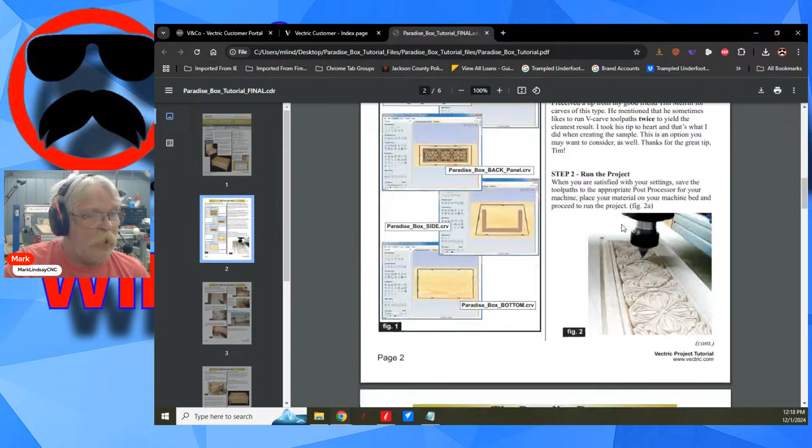It's step-by-step instructions and all of the CRV files needed to cut this project, and there are links to all of the parts and supplies that he used for it. To show you how old this project is, this is compatible with VCarve and Aspire version 7.5 and later.

Now, something else to consider: you have to go through and check these out one by one. But a lot of these projects are trial version friendly, meaning that if you have the free trial, it will run on the trial version. You will need to go through and look at each of these.

This Christmas sled is also very well received. It's a little miniature sled for Christmas, and it's a very well received project. A good percentage of these are trial version friendly, meaning you can open up this file in your version of the software, generate G-code, go outside, and cut the project itself. There are a multitude of projects over here. I mean, you name it.

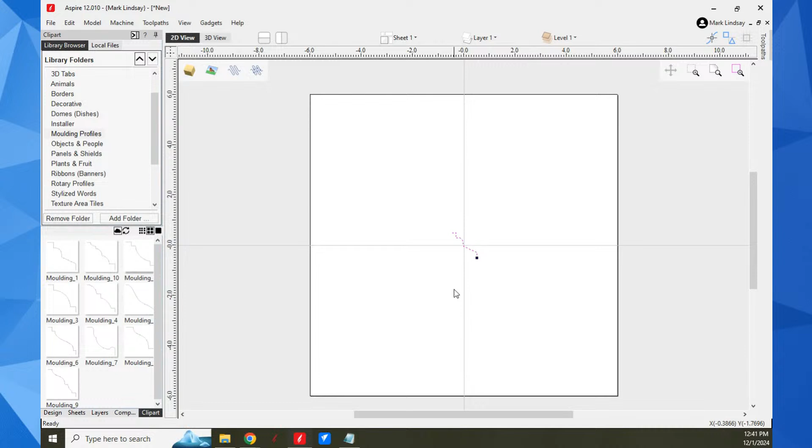Okay, Butch is referring to - let me bring this back on screen - these, let's see, not 2D vectors, it would be molding profiles here. Butch is referring to, let's use this one because it's simple, these molding profiles. Let's put it somewhere where we can see it, not on the center lines.

And using them, you said using them with the create shapes with custom profiles. So you're basically using either two rail sweep or extrude along one or more vectors.

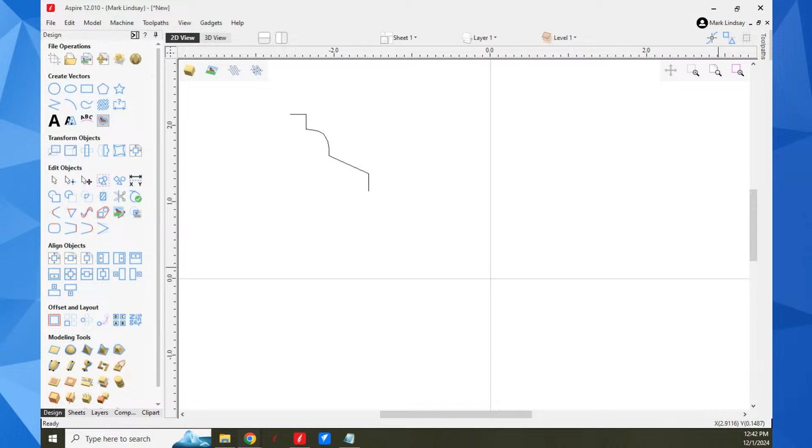How well does that work on, say, a sign outside border, and what bits to carve? They do work very well as far as an outside border. But the thing you have to remember is, let's say this is my outside border and I want to extrude this along - let's see, fifth icon along the top row - oh, this one here: create shape using a custom profile.

You know, I don't know that I've ever used that. Let's try it out. What I'll need to do though is create a vector. So let me create a vector. I'm going to make one. We're going to see how this works.

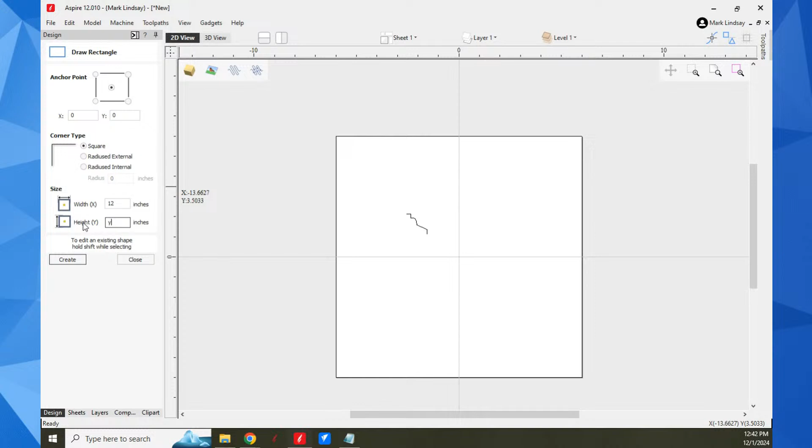And we'll go x0, y0, and I'm going to make it the same, x equals, and y equals - mainly because I don't remember. Create. Okay, so I've got a vector here. Yes, I got a vector there. That's the outside border. Now, so let's go in here.

I've never used this, okay? Create a custom shape. I'm guessing we're going to do that. Preserve internal corners - yes. Scale 100%. Base height is 0. See, I have never used this, so I think I know how, and let's find out. Let's create it.

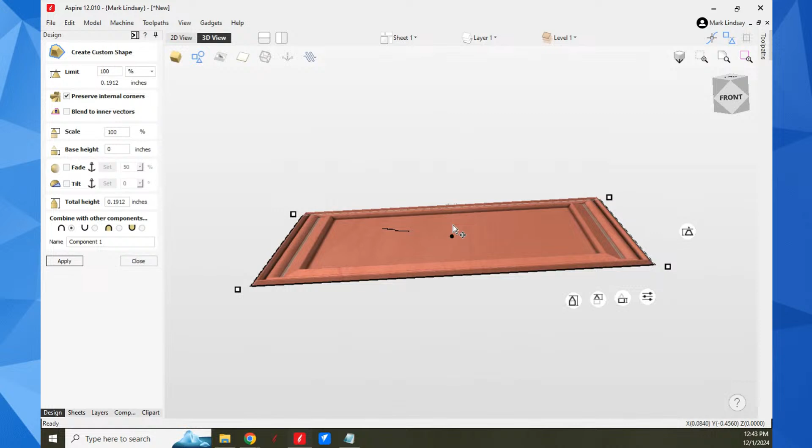And we'll look at the 3D view, and there it is. So it has created that shape, but not as an outside border the way you're thinking.

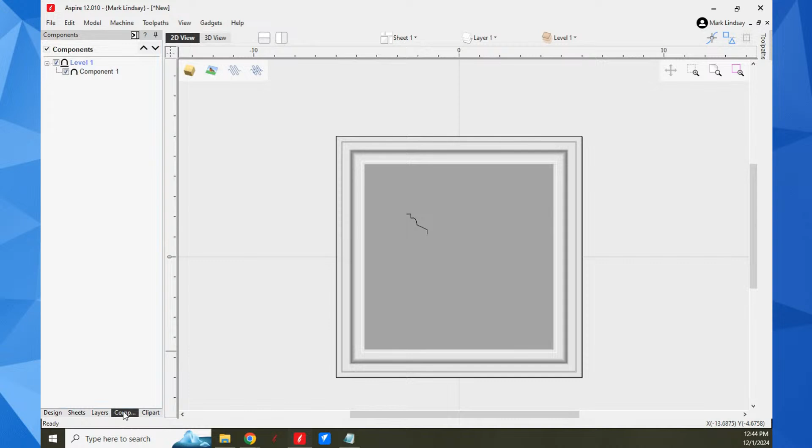Okay, if you're talking about - let me close this, go back up to the top view, go into the 2D view - if you're thinking about, well, let's go into the component tab and let's see what we've got here. Properties, and that's our height. Close, go into the component tab there, and try this, go into properties. It's still creating custom shape.

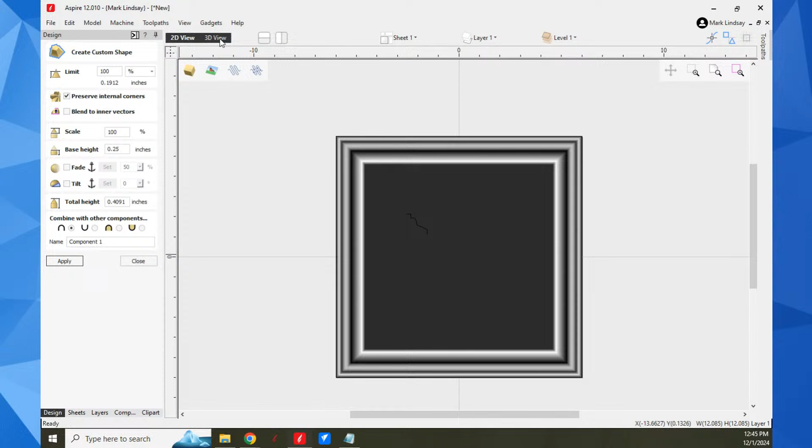Okay, I can set - let me see - I'll set a base height of 0.25. Let's try that and see how that works. Except I don't think that is going to be - nope, that's not going to be. You're talking about making a border. So if I have a piece of material that's 3/4 inches thick.

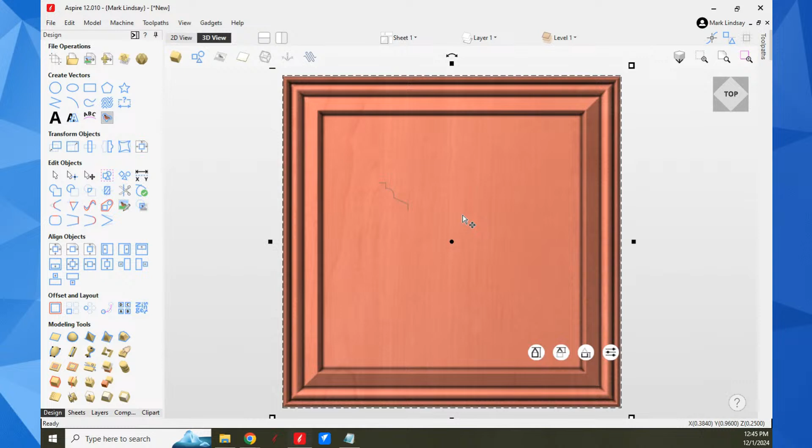Oh, you know what, Brooks? Thank you, you're right - from the left edge. Thank you. Close. And let's go back over to the 2D view so I can see this easier. Control Z, and Control Z again, and Control Z again. There we go.

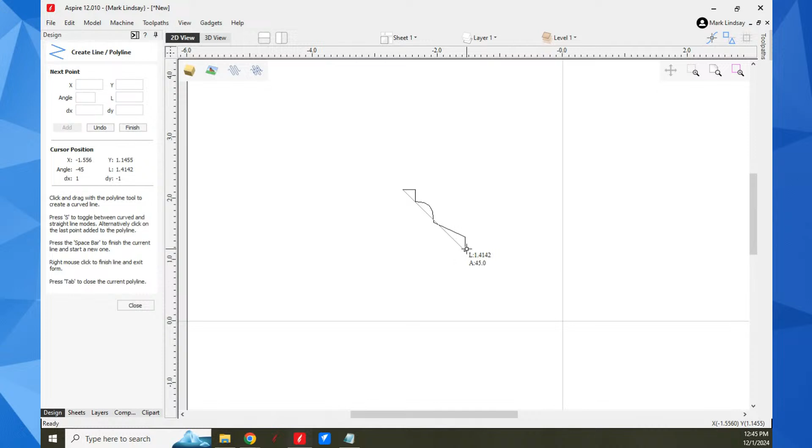Thank you, Brooks. So we need to put a vector here. So I'll click and then I'll smart snap to that. Have I got my geometry snapping on? Yes, they are. Let it wake that one up. Well, why aren't you snapping? Why aren't you snapping to that vector?

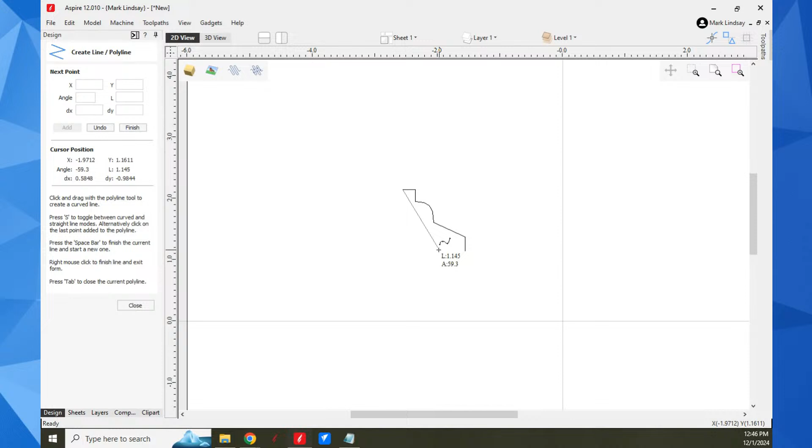All right, fine. Let me join these. And J on my keyboard. Join them. Close.

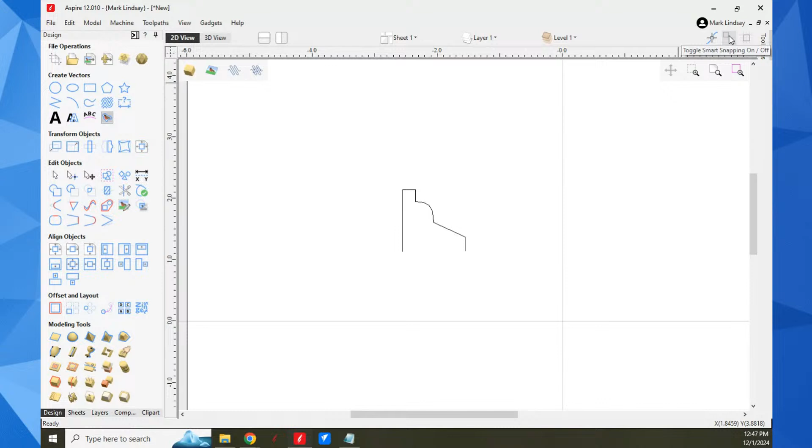Go into node editing. Why are you not snapping? Now that's just not right. That's just rude. Okay, geometry snapping off, on, off, on. Now,

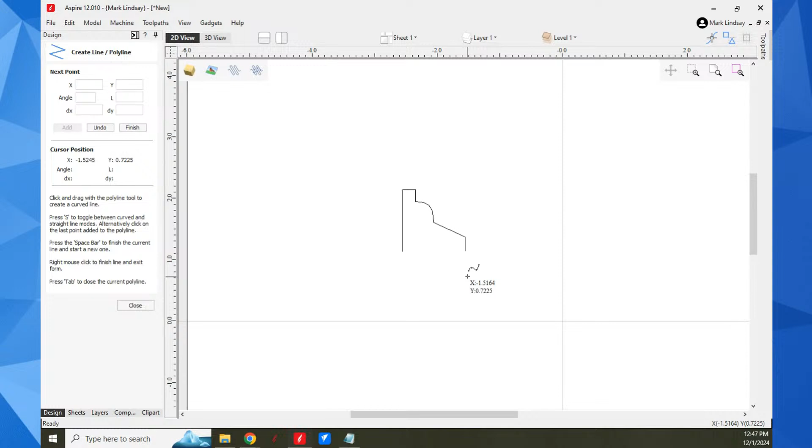Why are you not snapping to the same level? I'm not getting a horizontal snap. All right, you want to be that way? We'll do it the old-fashioned way before snapping was a thing.

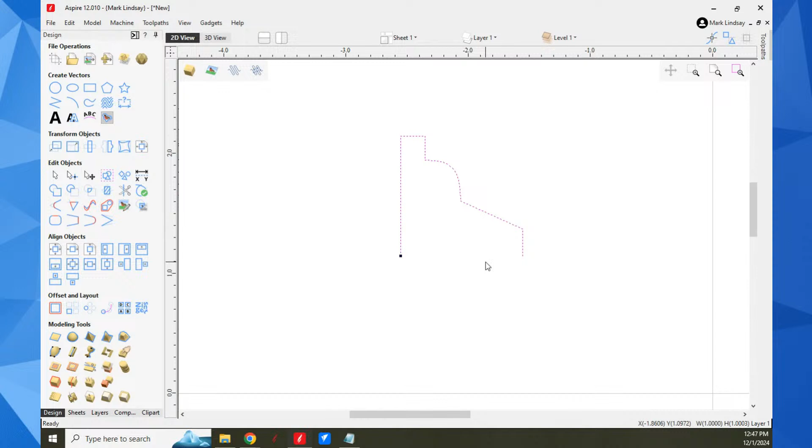Snap. Close. And now, grab the scissors, come up, snip, close, delete. All right, now I've got that, and that's all joined. So thank you, Brooks, for reminding me of that.

So now we'll select that outer vector. We'll go into here, and we'll select this vector, and we'll see what we get. Create the component. And now it needs to be reversed.

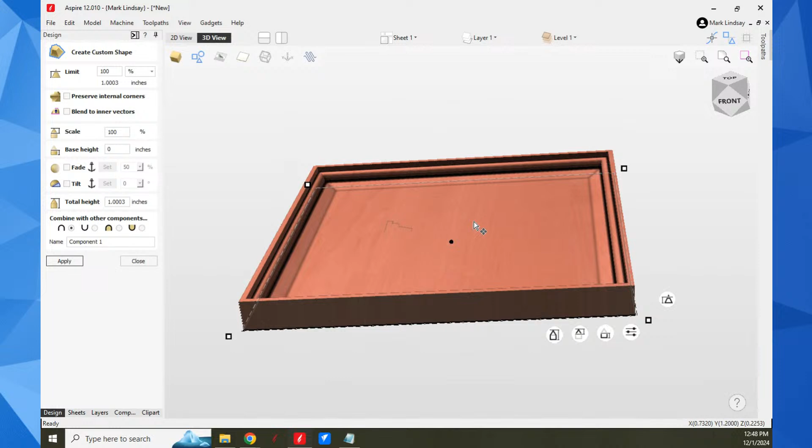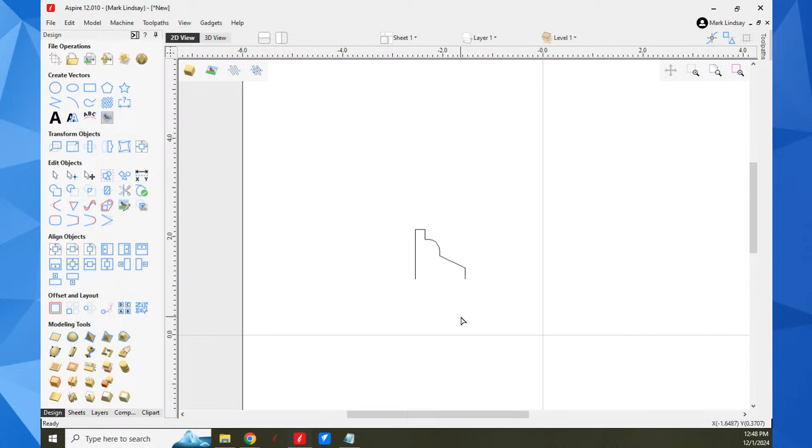Needs to be reversed. So we'll close, Control Z, select that, and let me go back into the 2D view so I can go into node editing, make start point. Okay, now let's try this.

See, I've never used this tool before. Okay, and we need to preserve internal corners. Create. Oops, 3D view. It still went the other way. All right.

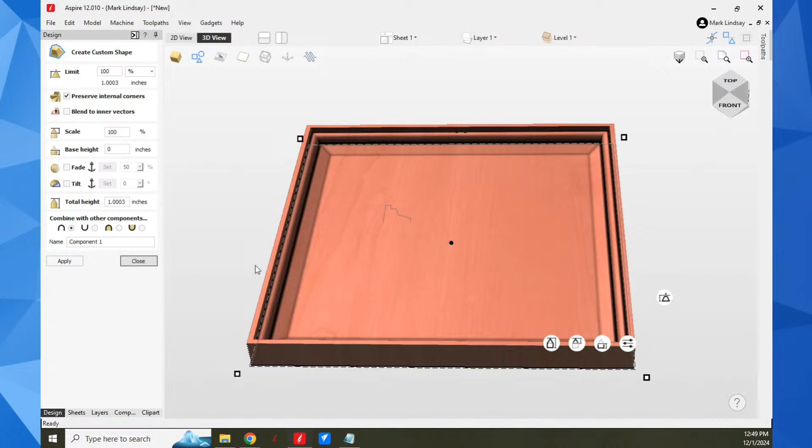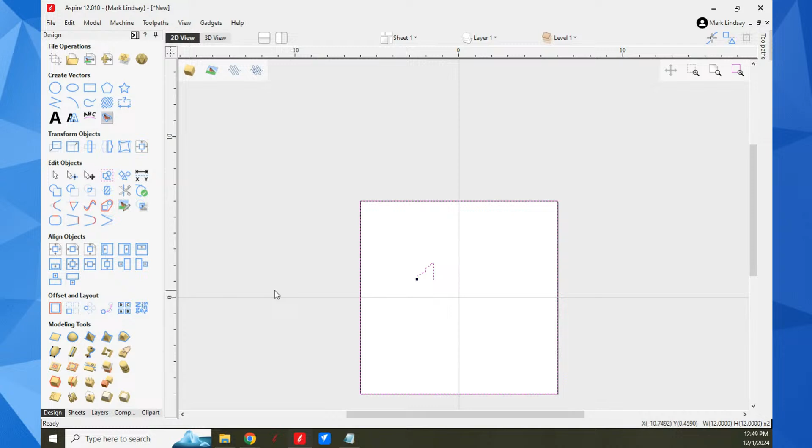Control Z. Let's try just flipping it. Let's mirror this. I don't think that'll be the case. Not rotate, mirror. Don't want to make a copy. Don't care about job center. Flip horizontal. Close. Try it. Worst that can happen is it don't work. I'd create.

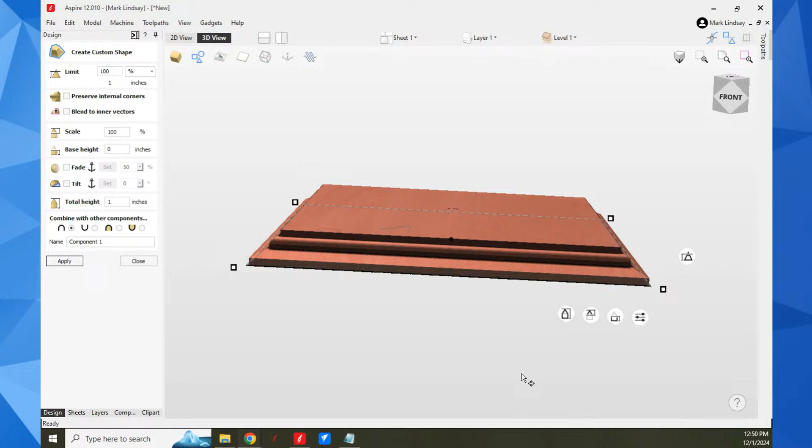There we go. It just needed to be reversed. There we go. It's a curved line, it doesn't snap. I didn't think about that. I thought I was drawing a straight line, but thank you, Pete. So that's how that works.

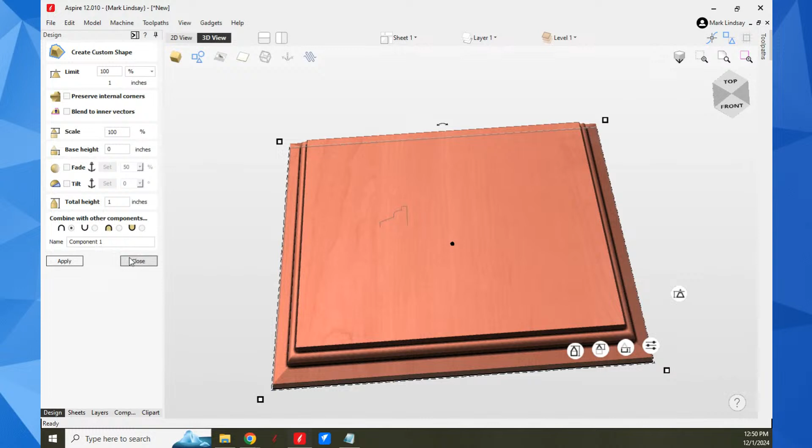And your next question, which was what bits to carve. Because we're working in Aspire, this is now closed, this is now considered just another 3D model. So what bits you would use would be a tapered ball nose, just like anything else. I would do, because you do have a vertical piece right here, a roughing then a finish tool path.

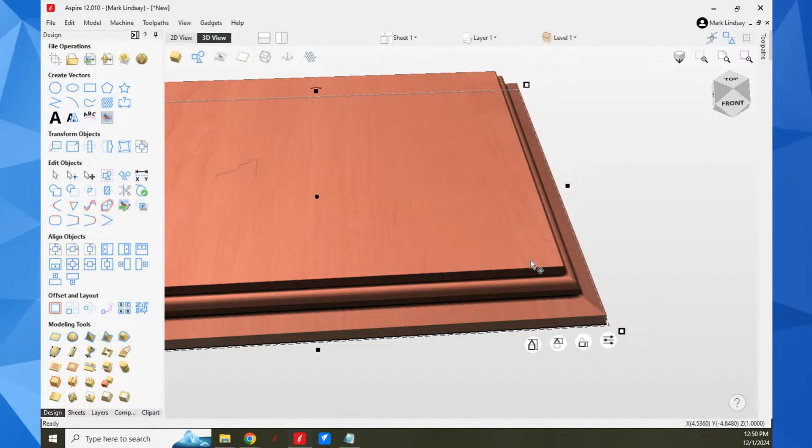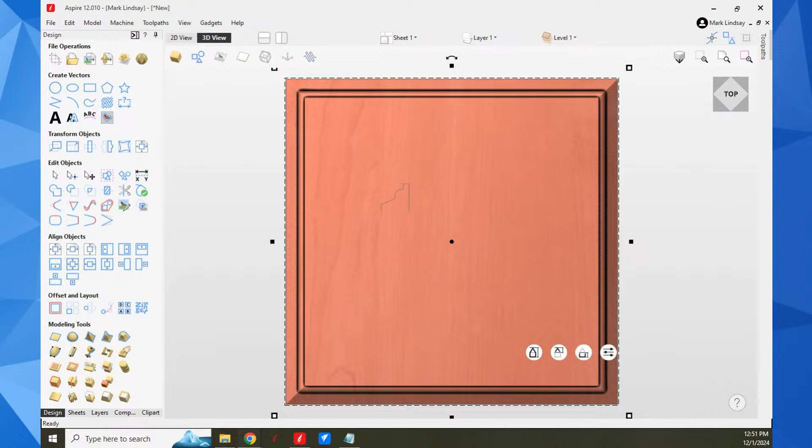You have a vertical drop here and a vertical drop there. The roughing should take care of, no, it won't either. So you will have a little bit of a taper to this edge here using a tapered ball nose, but it would be cut just the same as any other 3D model. So, yeah, roughing then finishing tool path.

And we would go, see, roughing, use okay, our thickness is 3/4. We got that. Model thickness exceeds the material thickness. So we'll click on set and we'll change that model thickness to 0.75. Click apply, then close that. Now let's take a gander. It has scaled everything to fit within our material. So I can click OK.

And that was a finishing. I didn't mean to do finishing, I meant to do roughing. Close. Do a roughing tool path with a 1/4 inch end mill to the selected vector.

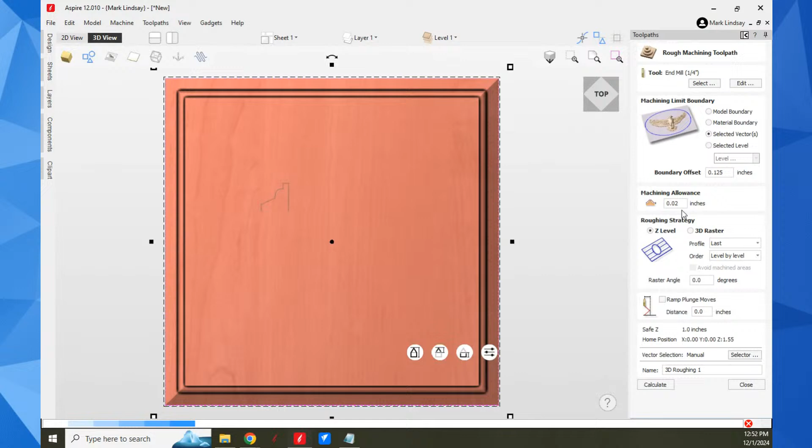Dabba dabba dabba dabba da. Go with Z level. 20 thousandths machining allowance, and we'll calculate. And then select the vector. There you go. Calculate. And there's the roughing tool path. And there's that.

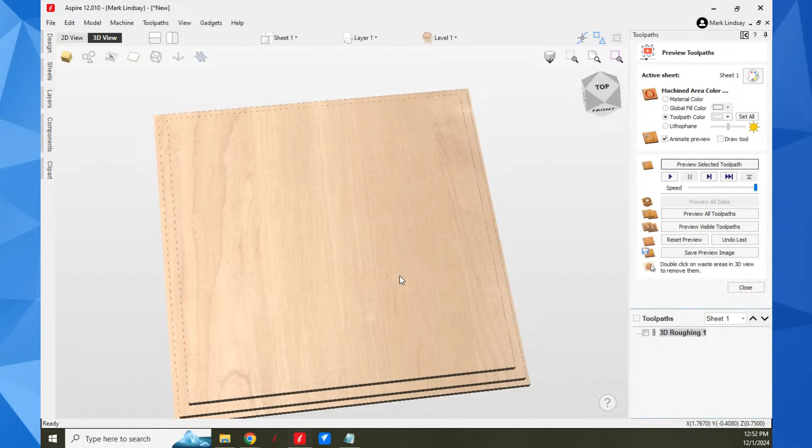Now we'll create a finishing toolpath. Not going to use, well, not going to use the 1/8 inch. I'll remove that. Selected vector, no boundary offset needed. I think for this I will use offset, and we'll calculate.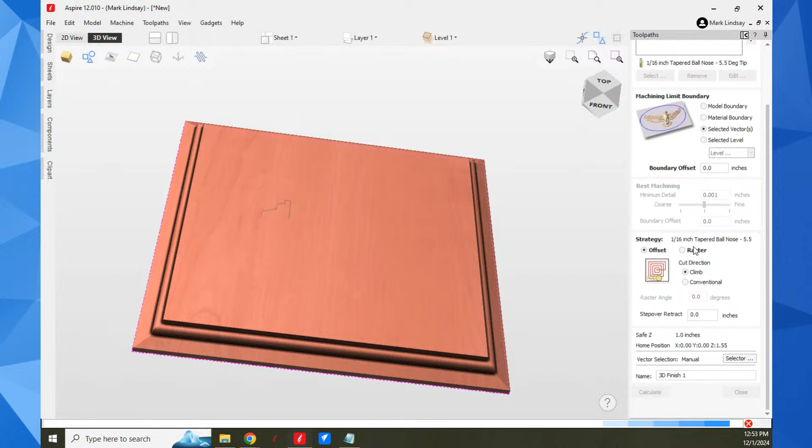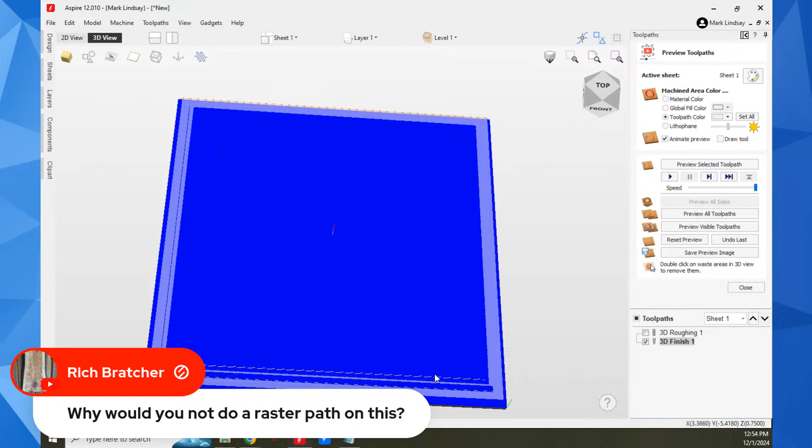And we'll see how long this is going to take to preview. Why would I not do a raster path on this? Simply because, whoa, look at this. Simply because I want, if I use a raster tool path, it's going to go back and forth and do these sides perfectly, but then it's going to start doing real short passes right here. I would actually want it to cut around the machine, the entire thing that way.

Now let's go ahead and preview this and just see what happens here. And there we go. I'm going to turn off my heaters while this is running. Getting a bit toasty in here. There we go.

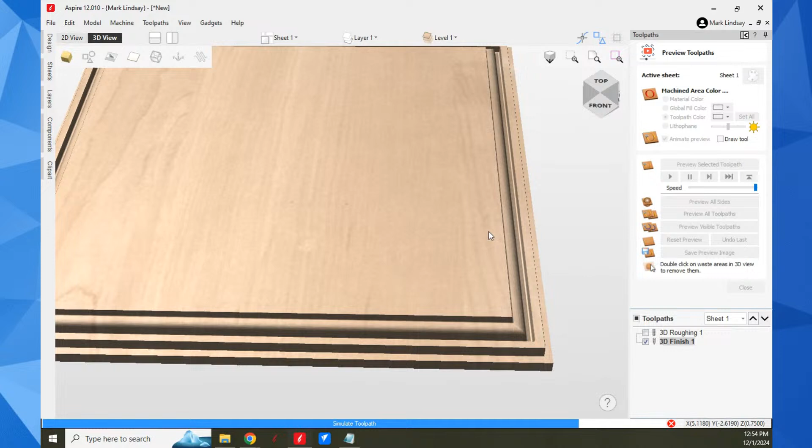And this is running with a 1/16 of an inch tapered ball nose bit, so the step over is very, very small. But you see what's happening is it's cutting around the entire thing in one fell swoop, so we're not getting little short side to sides right here. It's cutting all the way around it, just basically making laps around the entire project. And we'll get into machining time in just a minute.

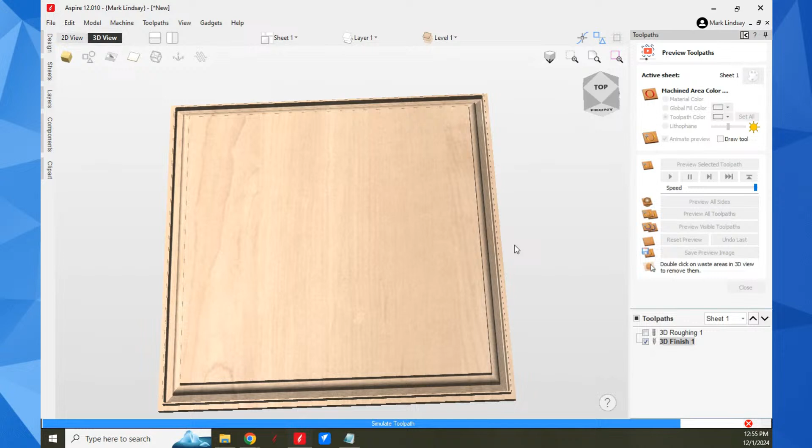Just about finished with our preview. There are slight angles it's carving down here, which is why it's not just cutting straight across. Almost done.

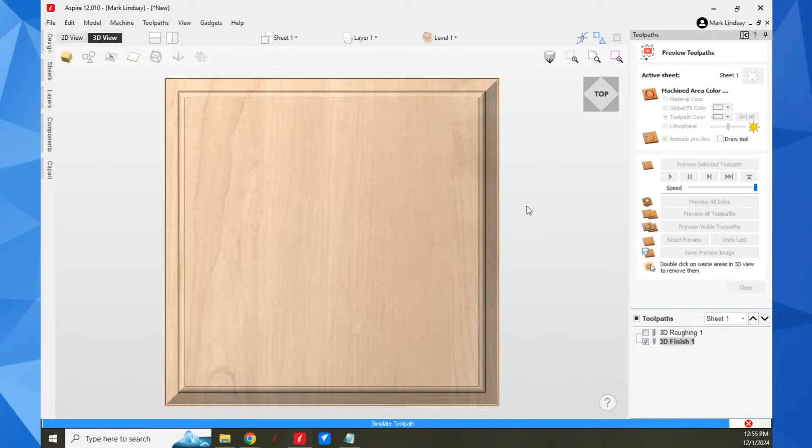Machining time is going to depend on several things, not the least of which would be your step over. A tighter step over will give you a better surface finish, but it'll also take a lot longer to machine. So we can look at this here, and that looks pretty decent.

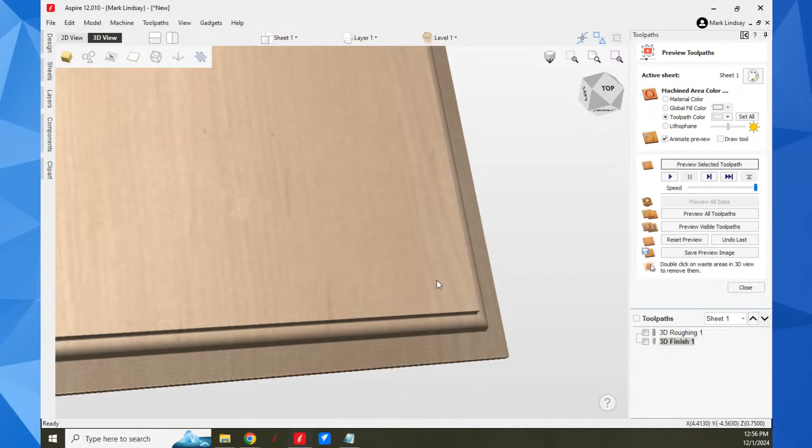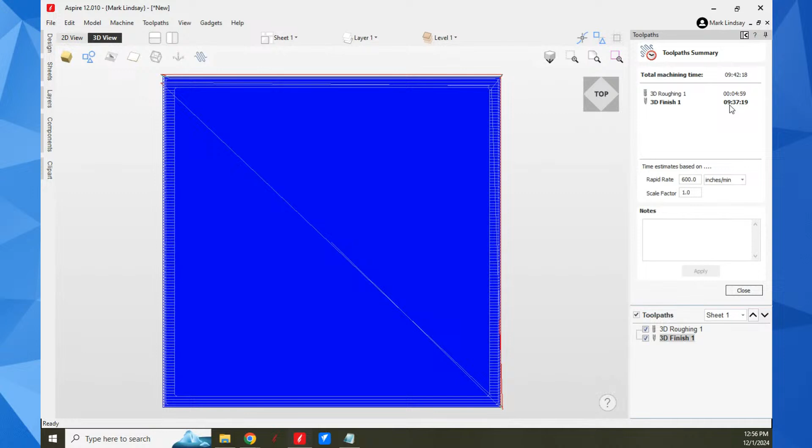Now, because we have made a 3D model, there are some issues we may have with this versus using the molding toolpath. For right now, let's take a look at this and you see what I mean. That's a 9-hour carve because it's a 3D model.

We close, uncheck this. It gives a good result. There's not an issue there. But a 3D model is always going to take longer to carve than a molding toolpath, let's go back over here.

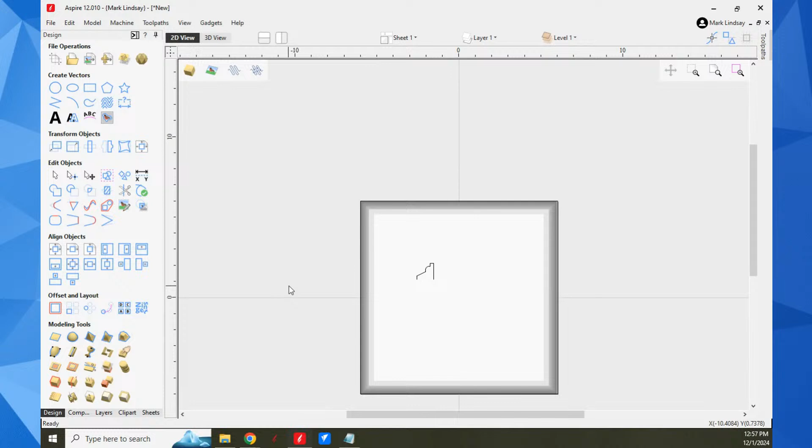I'm coming back over into the 2D view in the design space here. What I need to do is measure the width here, just because I don't know. So from there to there is 1 inch. Okay, that's fine. All right, I can come out of that.

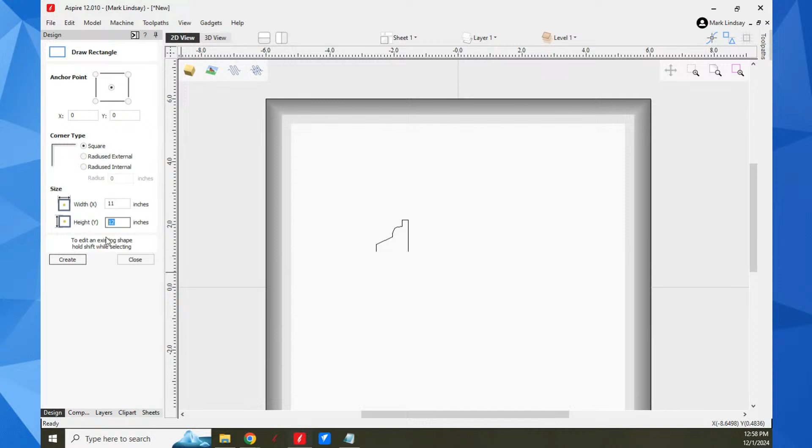And I need to create another rectangle that is 11 by 11, anchored at the same place. Close. Whoops, I didn't create the rectangle, dummy. 11 by 11, create, now close. Okay.

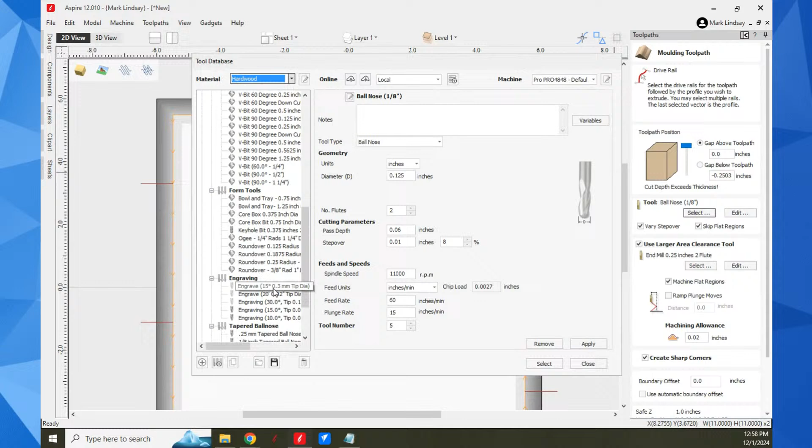So now we'll select that vector, go into the molding toolpath, hold down Shift, select that vector, toolpath all the way to the top. We're going to cut it with a 1/16 inch tapered ball nose, like we did the other.

I want to vary the step over. I want to skip any flat regions. I'm going to use a larger area clearance tool, my 1/4 inch end mill. It's going to machine the flat regions. Okay, I'll leave a machining allowance, 20 thousandths. I'm going to create sharp corners, and I'm going to calculate it. It's going to cut through the material.

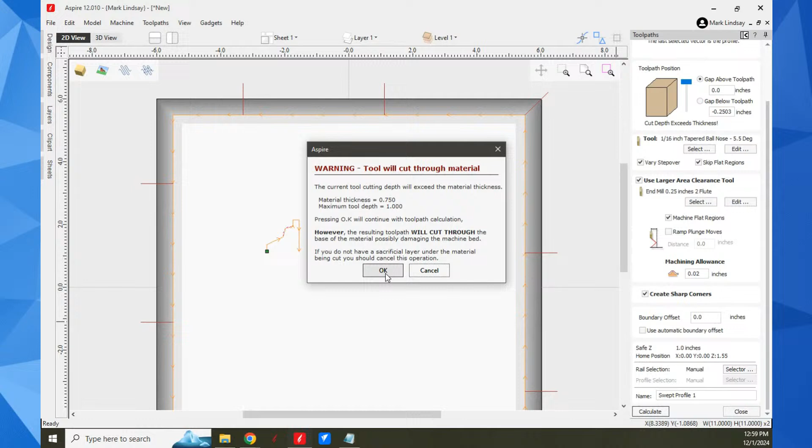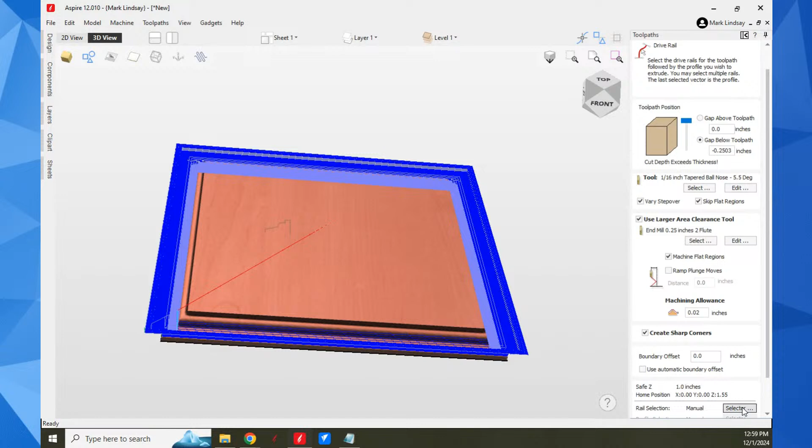We know. Oh, I didn't change that. And it ran backwards. So let's go back into this. See what we're doing here. Oh, I forgot to deselect. Uncheck these. Now let's go back to the 2D view. I want to reverse this rail.

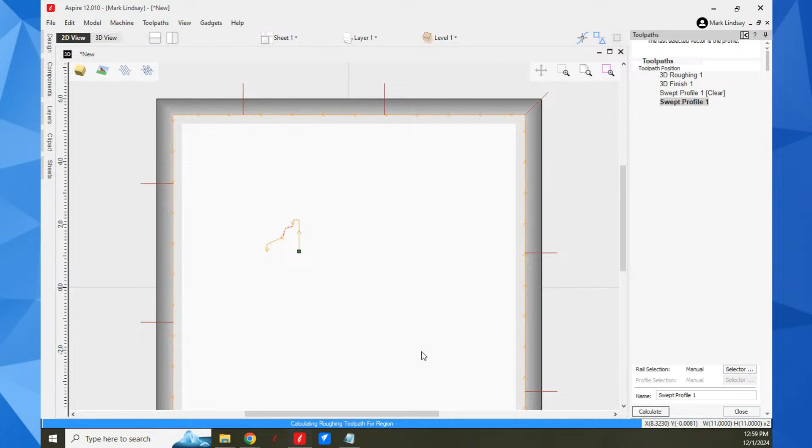Okay, there we go. Now let's try it. Calculate. Okay, that's better. I could preview it, but let's look at machining time first. 4 hours. So we've cut it in half.

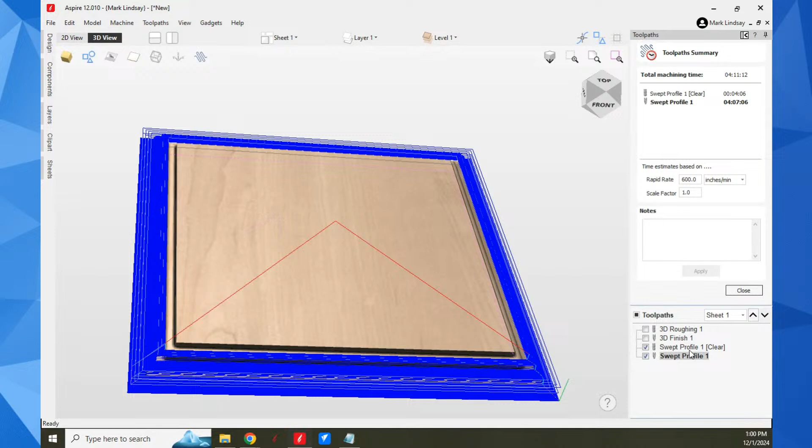We've cut the time in half by using the molding toolpath versus using a 3D model. 4 hours to cut this with the molding toolpath versus 9 hours as a 3D model.

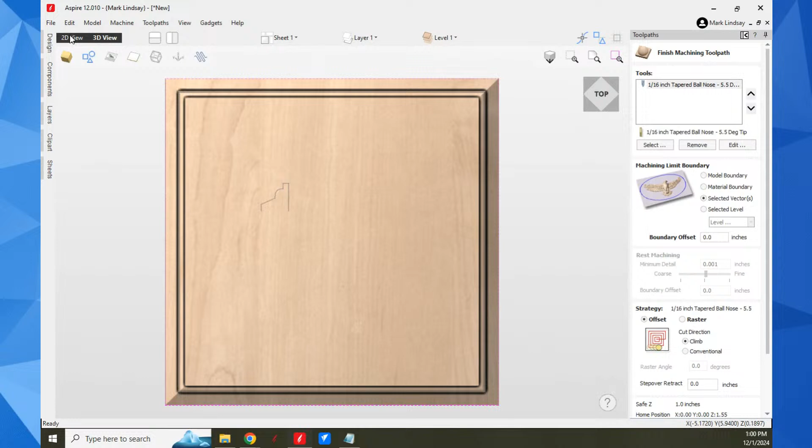Now, this is saying it's going to cut the top. It's not going to cut the top, but just to make sure, something I'll do here. Let's go back to the top here, the 3D finishing toolpath. Let's hold that down. So it's going to cut between those selected vectors. Calculate. And it's only going to carve that.

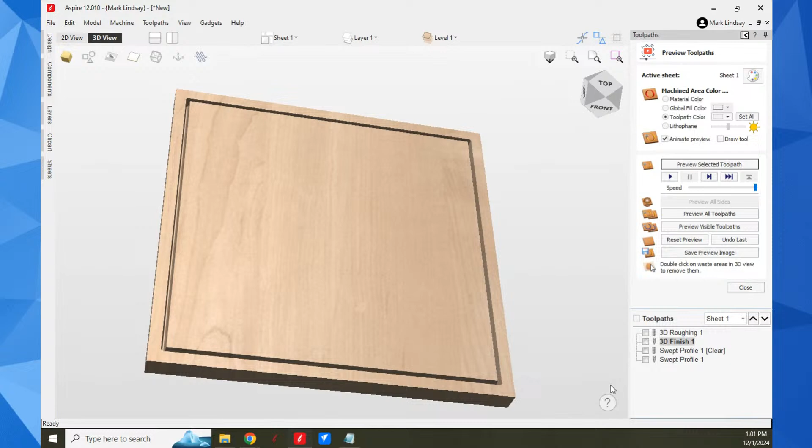Then it'll work its way down like it did. I'm not going to preview the whole thing because that'll take forever with that teeny tiny bit. Let's go back into the toolpath summary. And, oh, hey, I'm shocked. 1 hour 34. Oh, it's only cutting that area there.

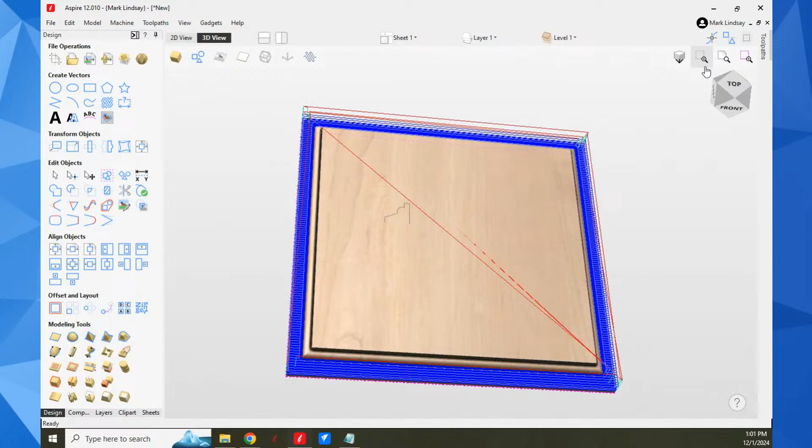There's a mistake. That's why. I do so love this kind. This is the kind of thing that I go through when I'm not live.

So I do this when I'm not live, but I get a chance to rehearse all this stuff. I see what happened.

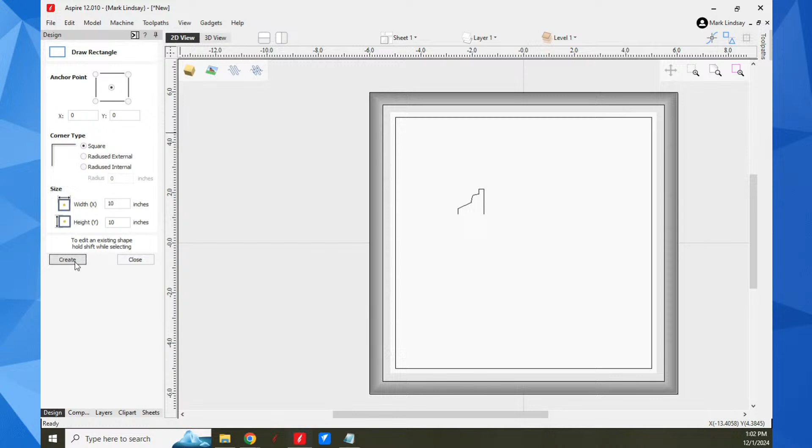Okay, let's go with 10. Still too much. That'll have to be a Control Z. You don't see this in the edited videos, but it works. No.

Try 10.5. So if I'm going to have a problem, it's going to happen when I'm live. There we go, excuse me, that's the one.

So let's go in here and use that one. There we go. Those two. Calculate. All right, that's got that entire model.

Okay, now let's take a look at these and see what we get. 2 hours. Okay, I stand corrected. It was carving all this, and there's no reason for that.

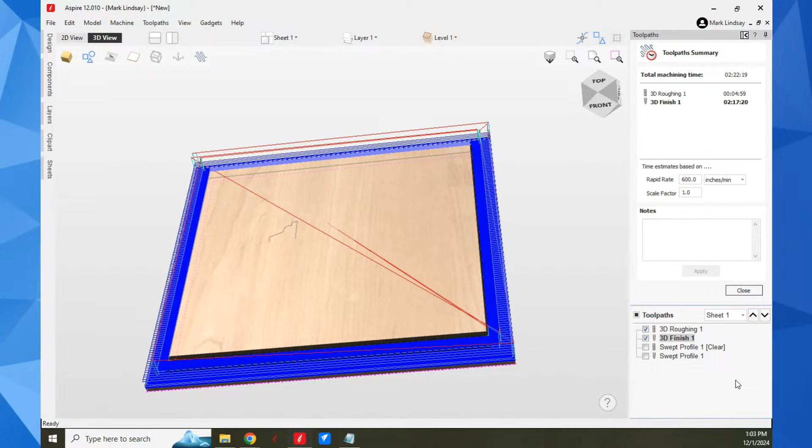But again, that is offset. Okay. And the 3D roughing, well, let's preview the visible. That's taking care of that. And the 3D roughing I did as raster, but that's okay because it's not doing much, if anything. It's just getting around the edge.

All right, and now here comes the 3D finishing. And it's not taking as long as I thought. Wow, okay.

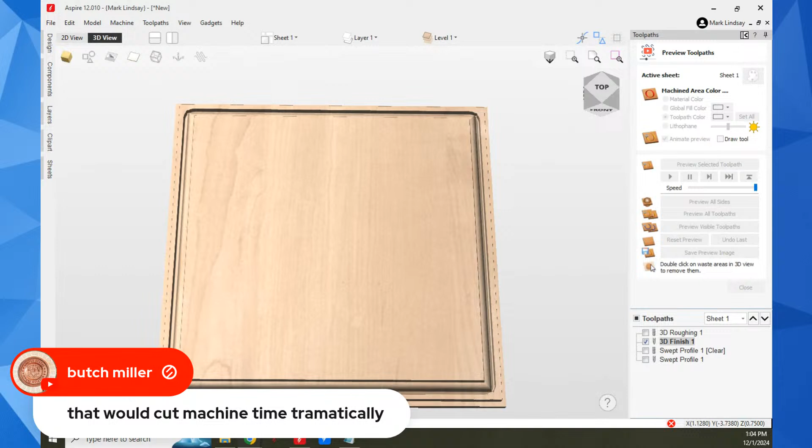Yeah, put a square vector in the center and do a profile cut and make a picture frame out of it. You certainly could. And then changing it, yes, that cuts the machine time dramatically, is putting that vector on the inside.

Now, what I forgot to do when I was drawing that vector on the inside, what I forgot was I made that inside vector smaller, an inch smaller. That was a 1/2 inch on each side. I needed to bring it in further in order to get this carve here done. So that was only cutting this area here.

And I think I also need to go do that on the molding toolpath. But I'll do that as soon as this is finished here. What is this we got going on here?

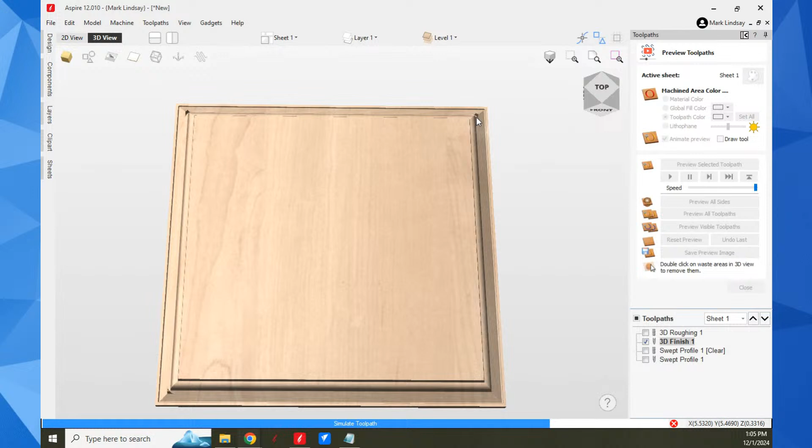Why do we have this here? Intriguing, oh we're not done yet. You're going to tell me you're going to come back up and cut those after you're done? That doesn't make any sense. That makes no sense whatsoever.

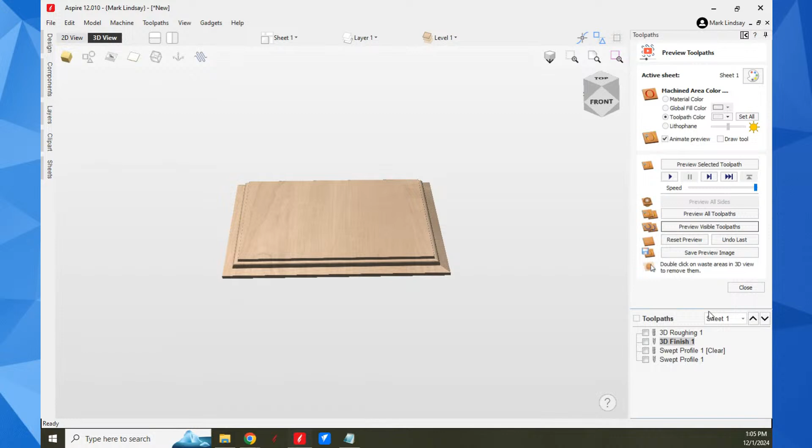There's that, that's finished. And we'll select these. The machine time is a total of 2 hours and 22 minutes. Let's uncheck those, go back into here, and yes, I need to use that and that.

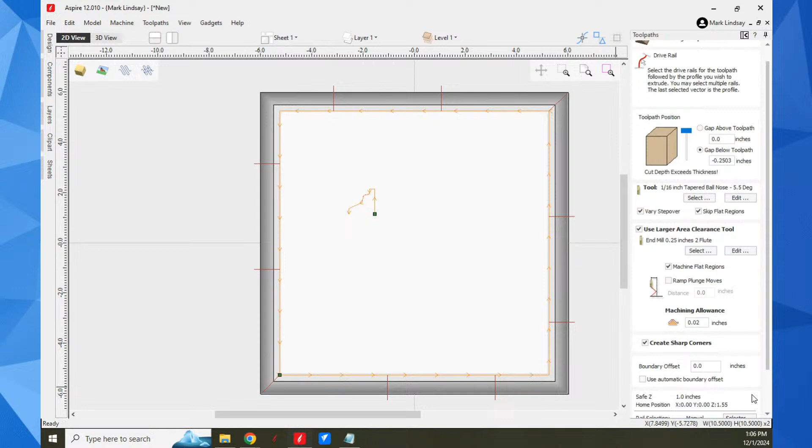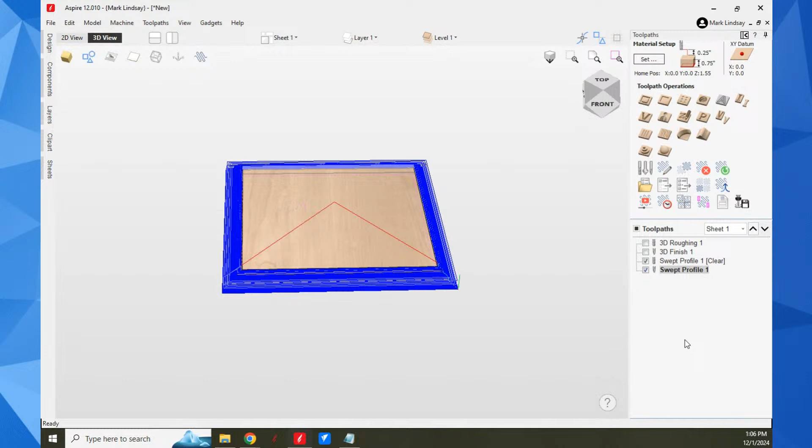And we will calculate. And now let's try it. We will check the summary. Still 4 hours, so the 3D model is faster this time. That is not always the case. So reset preview and we'll let these go.

Usually the molding toolpath takes less time than carving a 3D model, but evidently this is not the case on this one.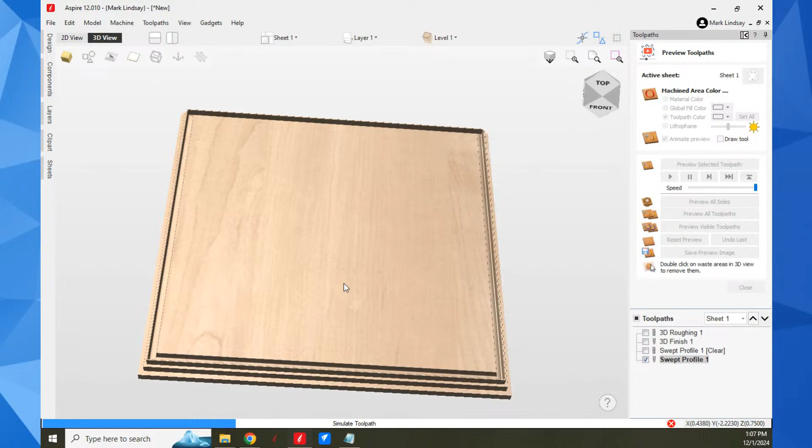Well, that's interesting, and thank you for bringing that up, Butch. I had not used that option, that custom profile. I'm not a very good 3D modeler, and it's simply because most of the things that I cut don't involve 3D modeling. So I have limited experience with a lot of these tools, and I just need to get into them and get into making more 3D models. And that's all there is to it.

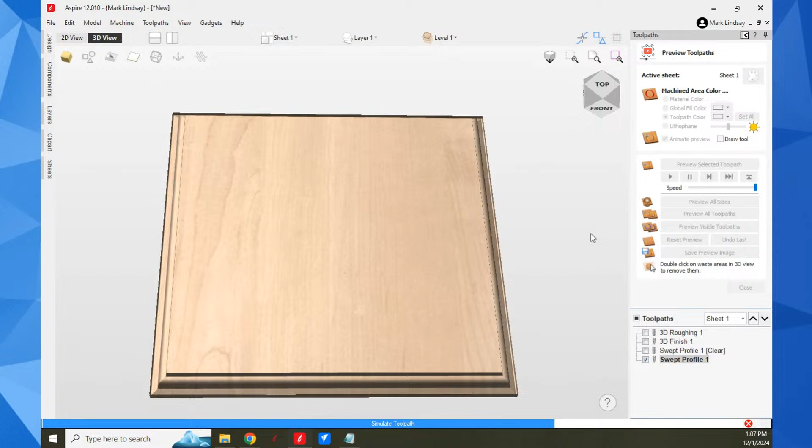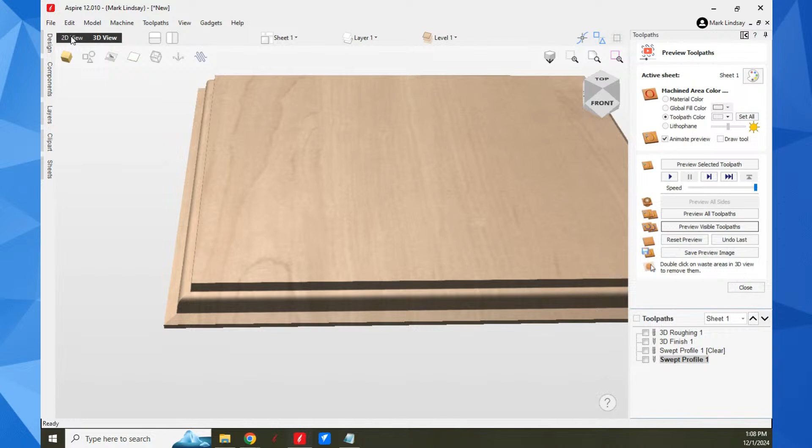Okay, we're running into the same issue that we had before, where the thickness is different. So we don't have that dramatic drop down here. It's much, much lower, simply because this vector is an inch tall and the material is 3/4 of an inch thick, so it's dropping that last 1/4 inch of the profile. So this bottom 1/4 inch down here has been dropped from the carve, so that would have to be resized here.

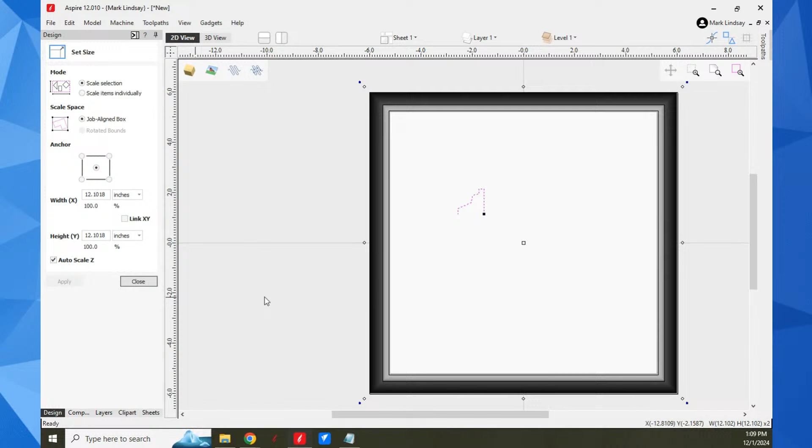So close, come back over here, we'll select this and we'll set the size. I don't want to link X, Y. Nope, nope, nope, close, I've got too many things selected. I just want this selected. I don't want to link the X, Y. How is that selecting everything? I just want to select this vector.

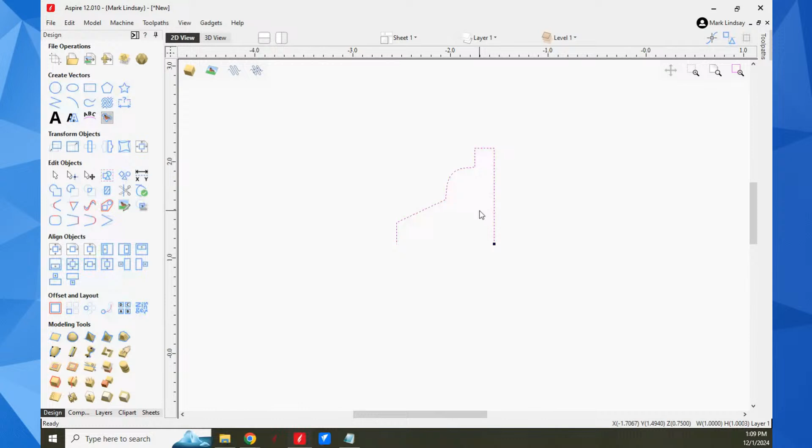There we go, don't want link X, Y. I want to make the height 3/4 of an inch. Apply. And that has changed that profile that way. I can Control Z to undo that and scale the whole thing. Link X, Y, and that keeps it in proportion. So now, if I go over here and recalculate, keep everything the same.

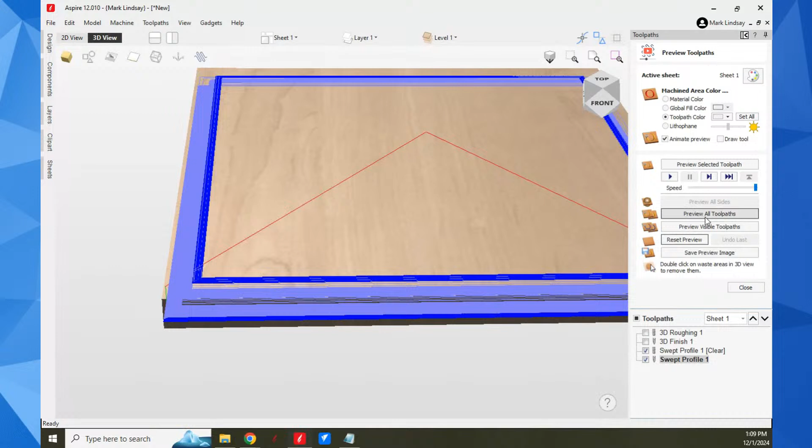Okay, reset the preview and preview those, we get a different result. And that result will be a heck of a lot nicer compared to that other size, the 1-inch height.

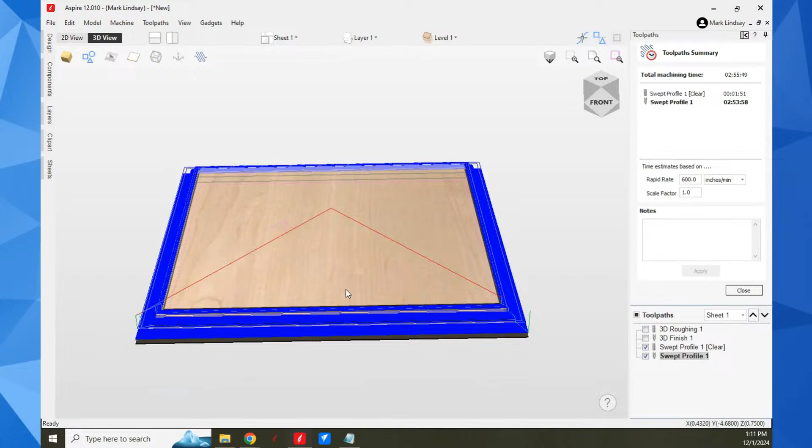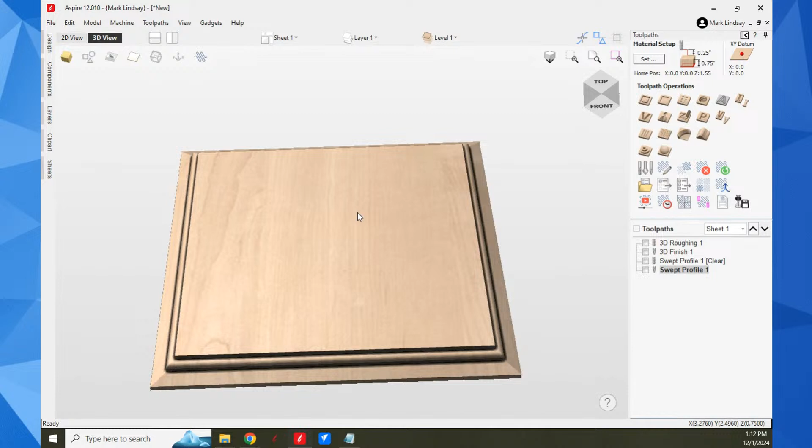And we now have the proper profile. Come on, let go. And we now have the proper profile that we should have. We turn off those vectors. There we go. That's the proper height, it brought back that thickness that we were missing there, changing the size. So there is that.

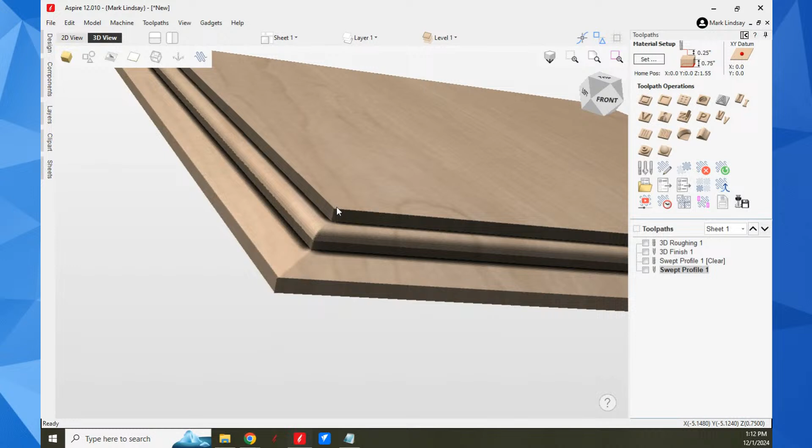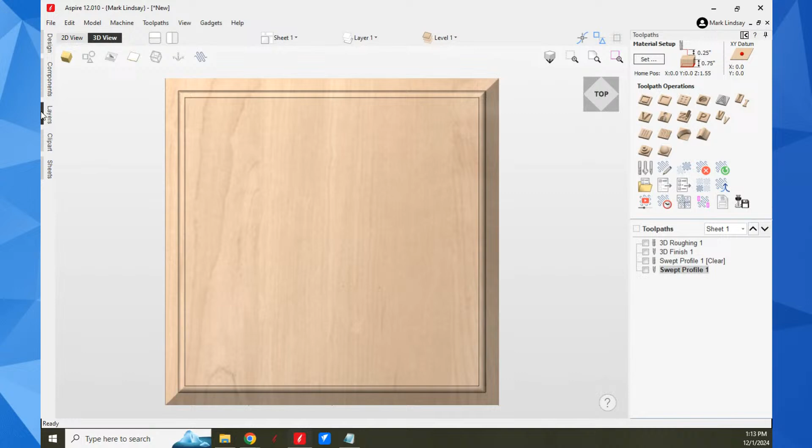And just looking at these things, I don't like the shading here. I could turn off the shading, just making sure these are square corners, and they are, because with that shading it looks like the corners were rounded. But if I go up here to view, use shaded background, or no, shadow shading, turn that off, we can see that we do have square corners. And you can again go up to the view window, use shadow shading, and that'll give you a little bit more perspective. So there is that. All right.